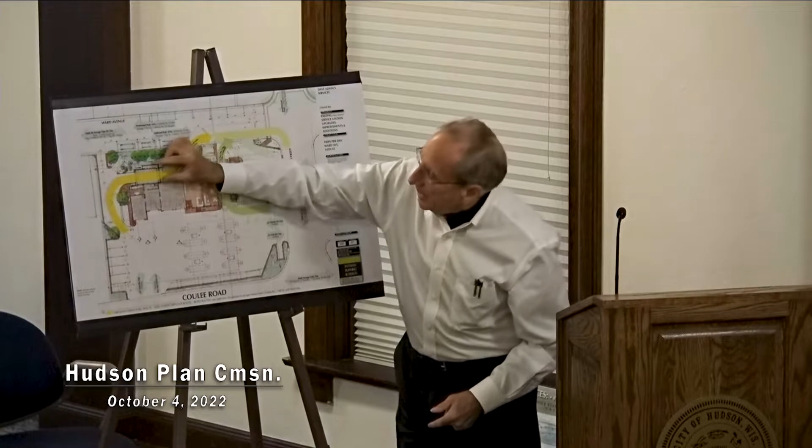This is phase 1, his garage. His car wash used to operate as a tunnel. I used it a long time ago, and some other people did too.

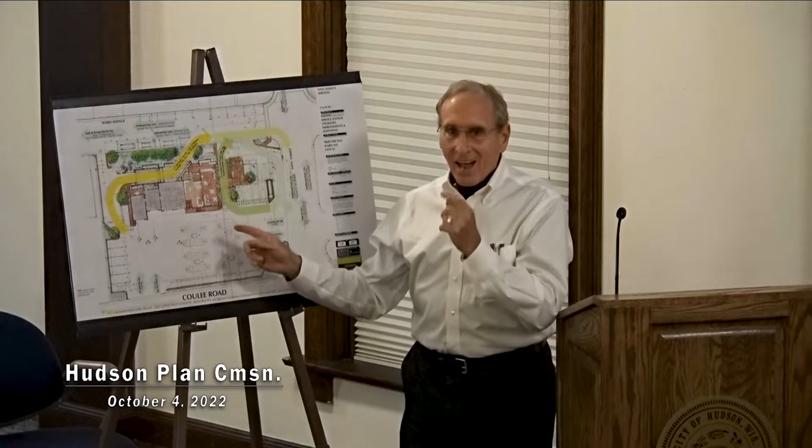1958 bathrooms in a Standard Oil station don't exactly meet Americans with Disabilities Act criteria. It's the best you could do in 1958. Boy, they're cool, those panels, they are cool. Well, one of them is really cool, but we're not supposed to talk about that.

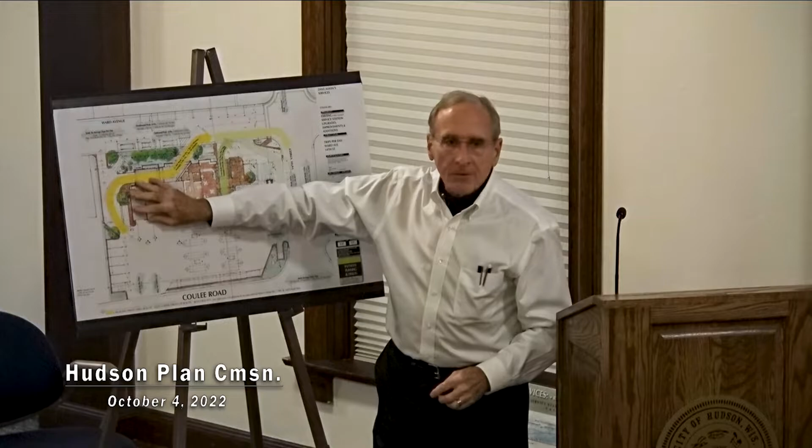So the idea is to do this in phases: to fix the garage, to add a garage, and to remobilize the car wash. And to do that...

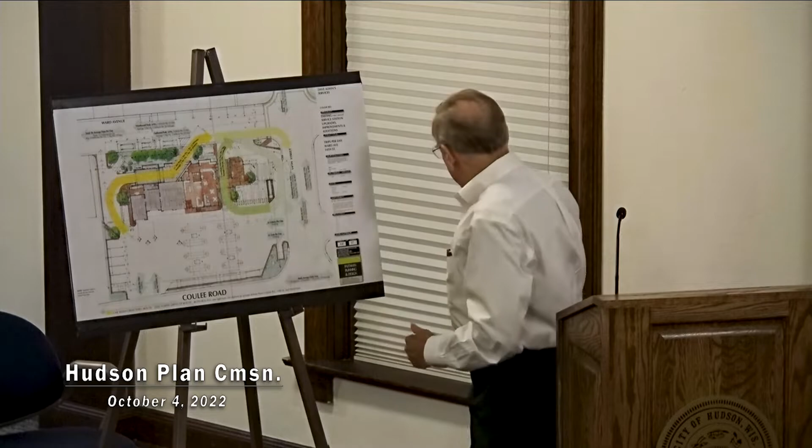If this end is closed off, a little bit bigger. This is the car wash right now, blue walls exist. If this is closed off and these become bathrooms and storage, and this car wash takes a turn...

Some could say that's not the most common approach, but this is a 23-foot-long crew cab pickup, monster truck.

I did a project called Liberty on the Lake in Stillwater, and Kwik Trip put its first non-standard building there with a car wash. The car wash has the door closed until the dryer cycle is completely done.

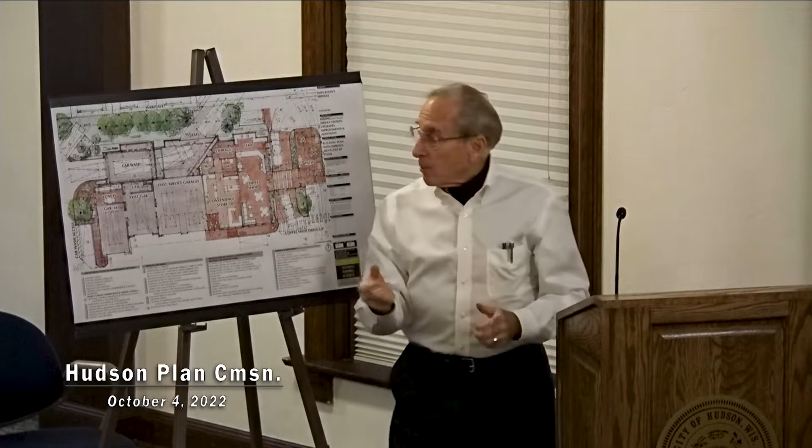So that's the idea of remobilizing this car wash, getting enough room to do what I said, to be able to do all the car wash inside the doors. Don't have to have the doors open. That's this, and that makes room for the bathrooms.

And this is his office, Mike's office, becoming his manager's office. And eventually, so here's phase 1 with this. This is probably phase 1, but maybe 2.

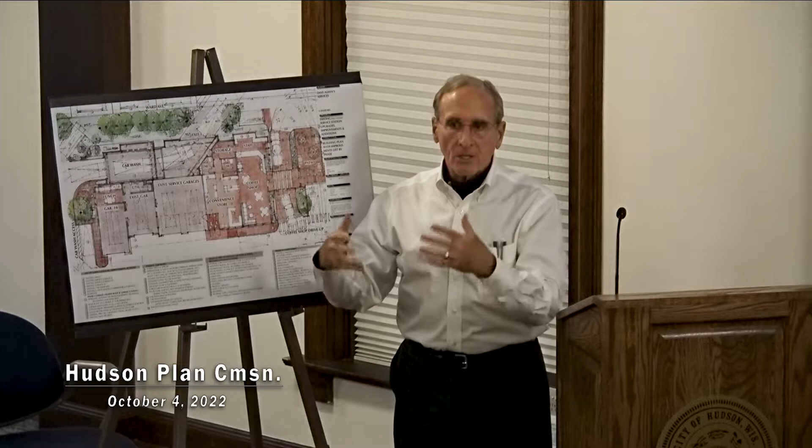Convenience store, there's not very many square feet, it's just some more products. And at some point, assuming we work out the flows and how to control the traffic, this is a small coffee shop with a drive-through.

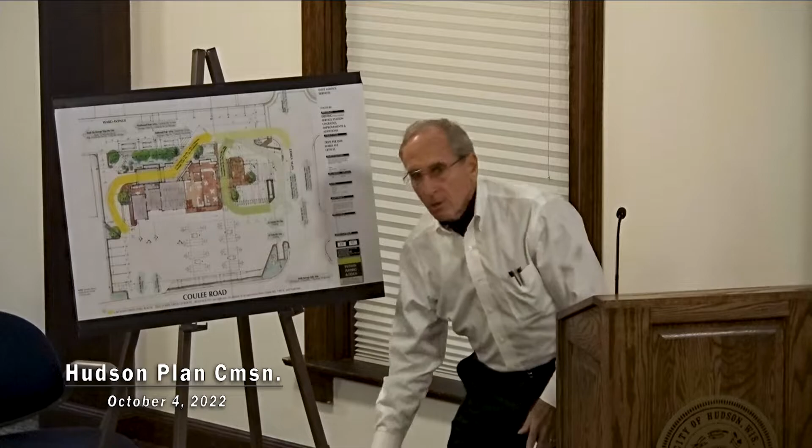And this was a pretty heavily researched bit of information with regard to the average trips through the car wash at the peak time of the year and not, and what the flows are through this car wash, through the coffee shop. Yes sir, where's the entrance to the car wash going to be?

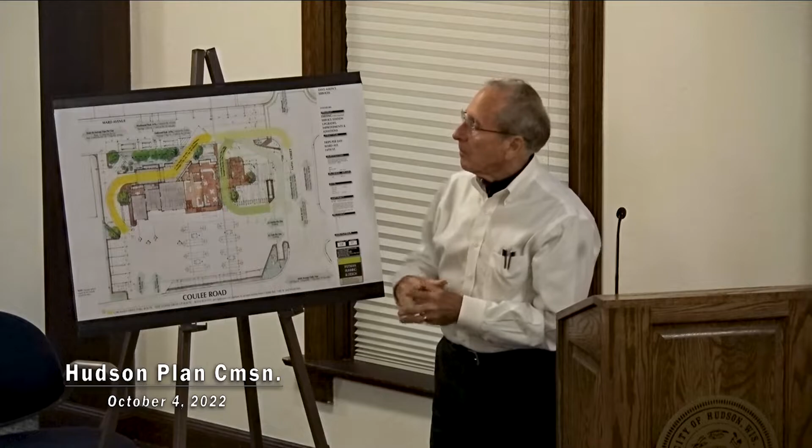If you're adding on 2 more stalls and closing in that third one, aren't you kind of sucking up the whole lot then? Looks like Ward Avenue. Is there still enough room?

Plenty of room. Okay, really, and in fact, if you look in the booklet, the multiple page 11 by 17 book, you will see the turn radii researched for composite vehicles.

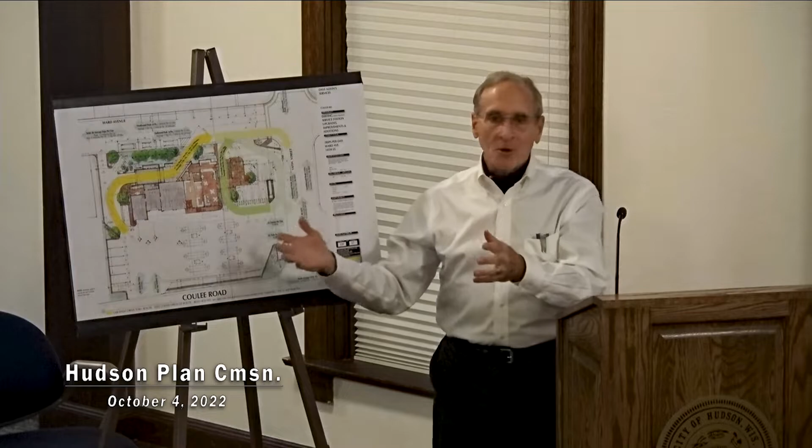That includes the biggest one. I just wanted to make sure there was enough room, why I asked. Yes sir, we painted spots out there, we turned trucks around. We tested it pretty heavily.

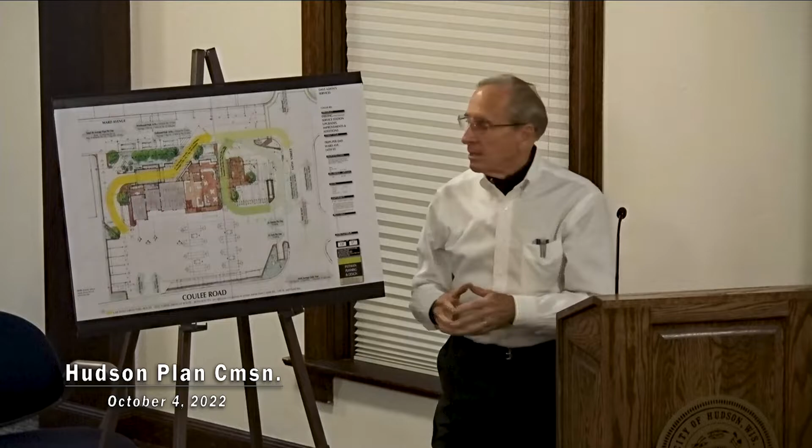Thank you. We've spent, honestly, months trying to get this right and do the best. We're not walking on water, we're just trying to do the best job possible.

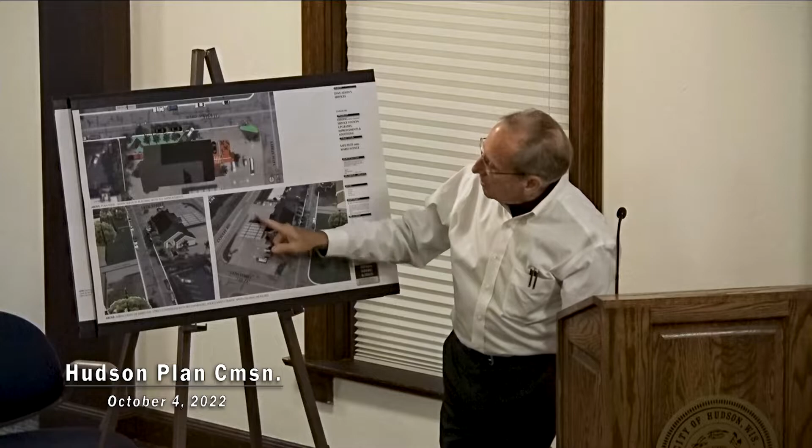Anyway, the 3D view or an aerial view of this. Here's the existing building, the cover over the gas pumps is not up in the air. This is kind of a modified aerial plus a 3D model, but here's the idea on this end.

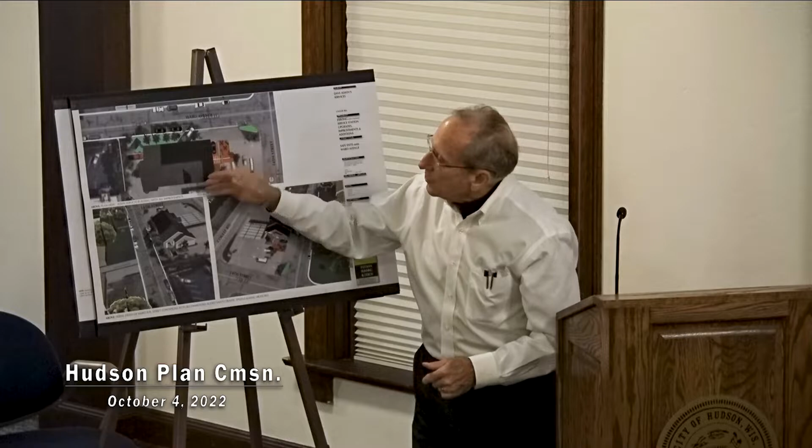Here's the existing building. Here's in the fourth, last phase would be the coffee shop, again assuming we can get all the staff comfortable with what we planned. And at the other end, here's that coffee shop, but here's enough room to make that turn.

And we did extend the existing space some to accommodate the vehicles, keep the door closed, and have room for real live bathrooms. So anyway, that's the 3D stuff.

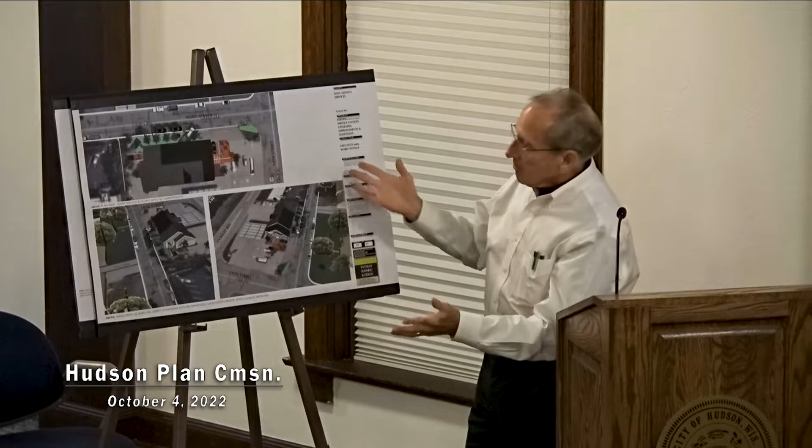I have way more boards. I can answer any questions, be happy to. Anybody?

So can I just ask, the turn into the car wash? You have the turn into the car wash, then you have arrows going to the exit. Can I come up and look at what... Yeah.

So the car wash is here, right? They're gonna turn in? The existing car wash, see these two blue struts? That's where the existing car wash is. We'd extend it that much. This is an existing garage, we'd add another garage.

If you go out there, you can see paint spots on the ground, or paving, and see how this route works. That's not what my concern is. I see how that route works. I'm saying when you have arrows going this way for people who want to exit and not go into the car wash...

Do you use the car wash downtown at what used to be Freedom? Yeah, but I'm just asking, because you either have to back out of that one or go through it. This was a way out if you changed your mind or forgot your credit card. So it's not meant for other cars to pass around? No, quite the opposite - that is not an exit, except for car wash users.

Okay, Mark, maybe I missed it, but what are your phases and as far as the timeline? Yearly, monthly, what's the plan going forward?

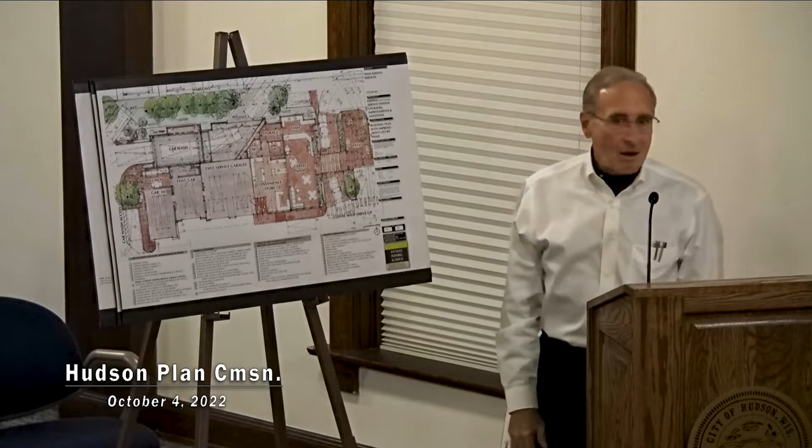How's your crystal ball with regard to the economy? If it's good, good. If we have a rerun of 2008, 9, 10, 11, hard to say. It's a big concern, yeah. I mean, I think it's neat, so I like it.

If you have cars parked on the north side of Ward Avenue, you're coming out of the car wash, is there enough space for a vehicle to turn west on Ward Avenue? Let me get the other board up.

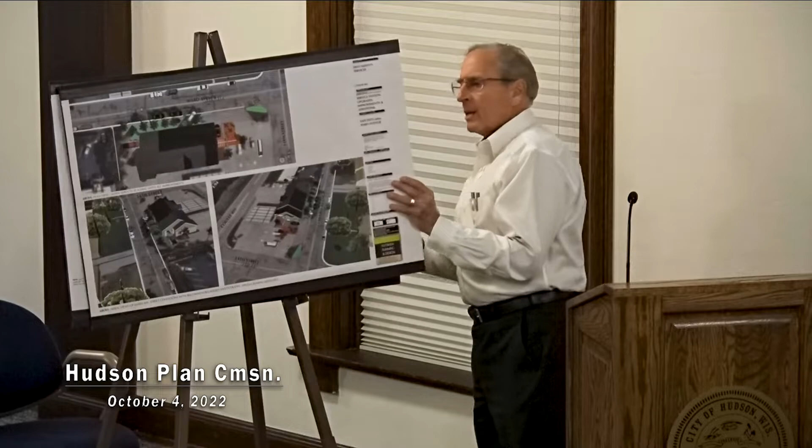I had it once. Are you able to see this okay? I'm looking at that right now.

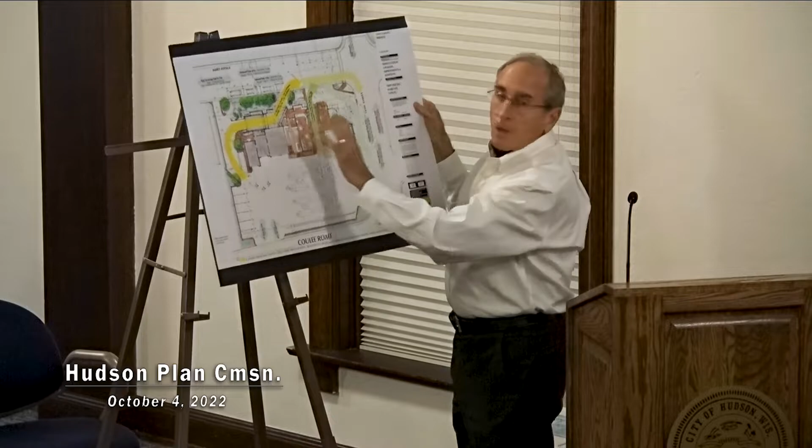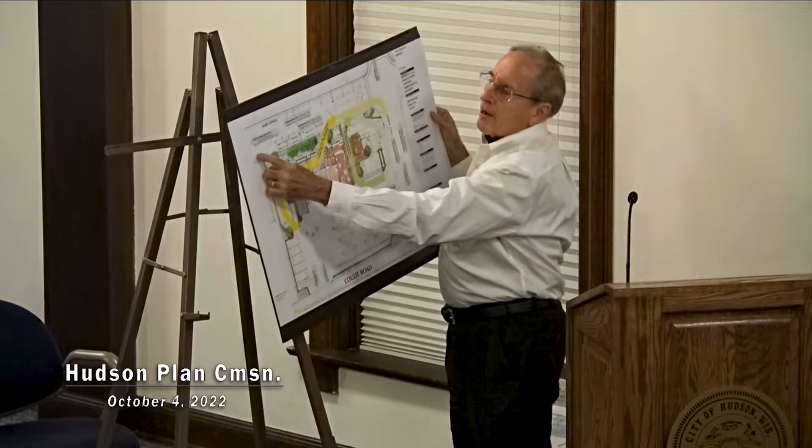The office building next door has 4 or 5 parallel parking spaces, and the last one comes right to their driveway here. And this has more space on either side than they do.

There's much discussion to be had with the city planner, city community development director, city engineer, and so forth, with regard to whether this comes straight out.

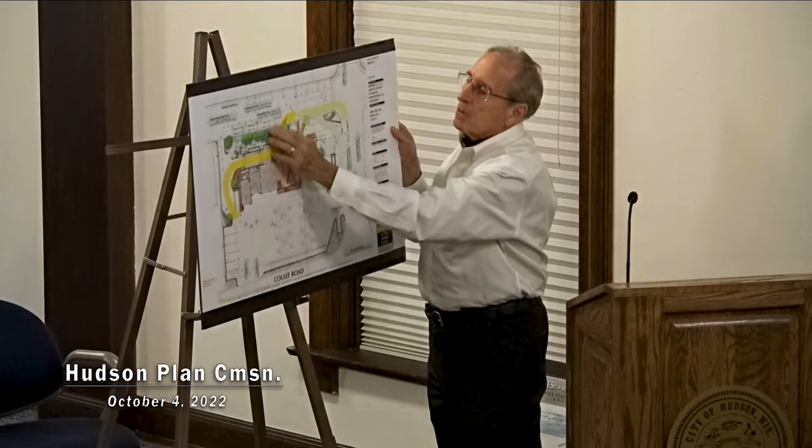This may sound crazy to use as the standard, but UPS plots or plans all their routes to take right turns because they're the safest. And this plan uses that approach to try to cause people to take right turns - right turn in, right turn in, right turn out, up here, right turn in, gentle right turn, when the left turn is inside the building, and a right turn and you're back out again.

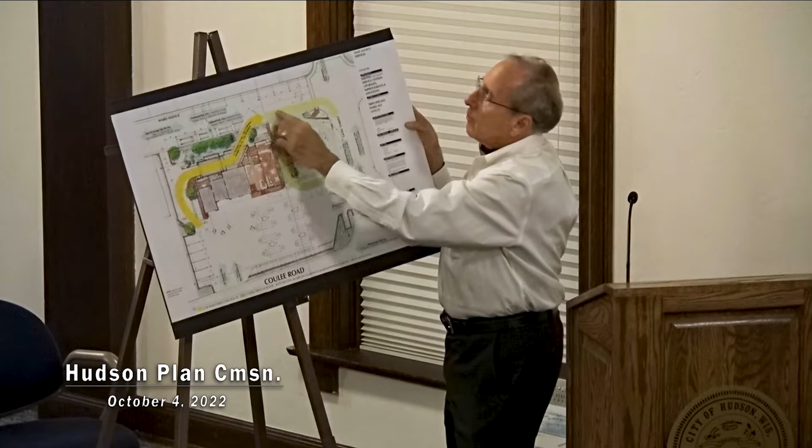So I'm not sure I directly answered your question, but the background is we provide parking spaces sized. No, the concern was, if a car coming out of the car wash decides they want to make a left turn onto Ward Avenue, is there enough space to accommodate a left turn if there are cars parked on the north side of Ward Avenue?

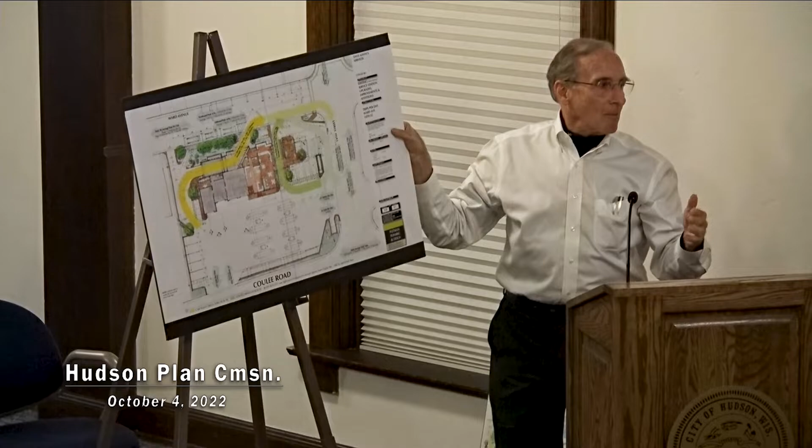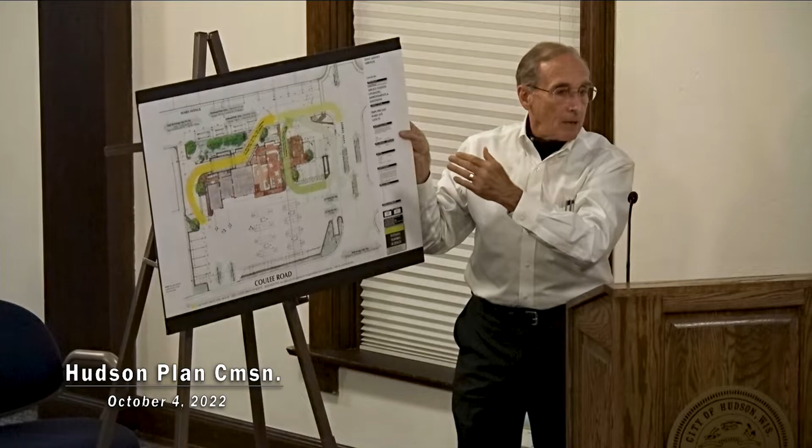Oh, yeah, that's a wide road, very wide. In fact, I studied it, and I didn't bring those boards along, but there is enough room to make the left turn. And by the way, the engineer report is recommending that this be a straight-out exit to enable that. And frankly, I think this is safer and better, and kind of oblique with regard to headlights spanning across people's houses on the other side.

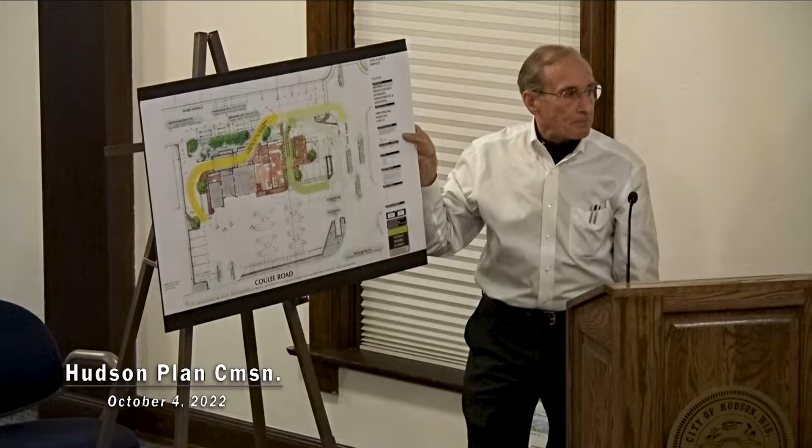There's other comments in the report, in the response, and I apologize for not getting it to you folks sooner, but we just got it yesterday. We did our best to get it to you quick. Ward Avenue does not have the traffic as of now, though. That would be the same as the Holiday downtown.

If you're trying to turn either way, but unless you turn right or go with traffic, your exit's pretty easy. If you decide to go left and cross that lane to get to the other side, the exit is not easy, because you have to wait for a slot for both sides to open up. Obviously some of that would have to occur here, except there's no traffic as of now.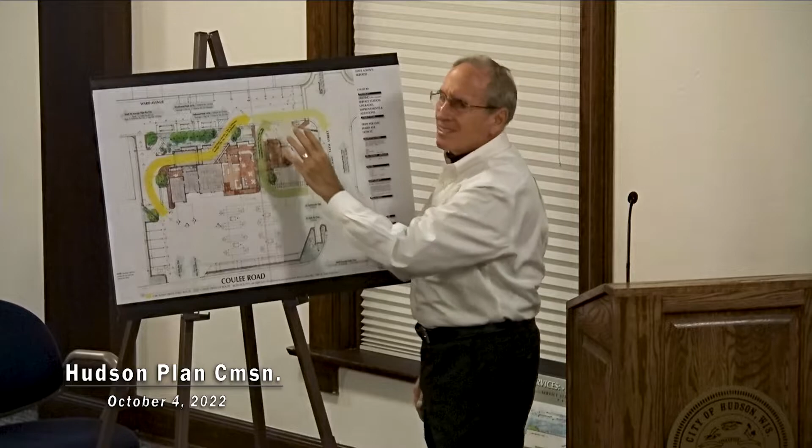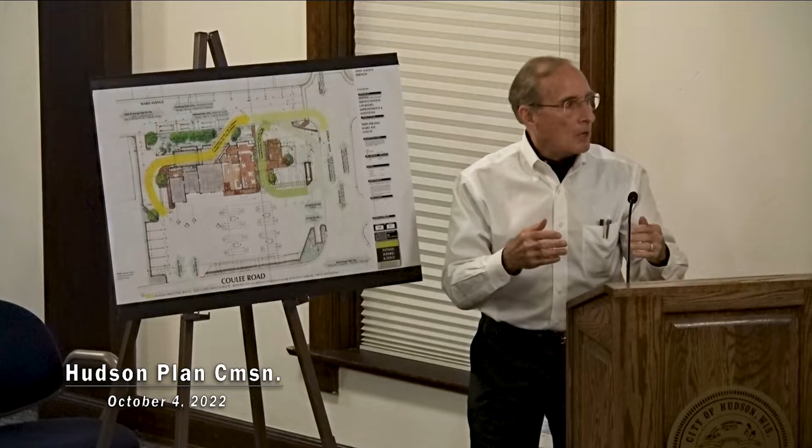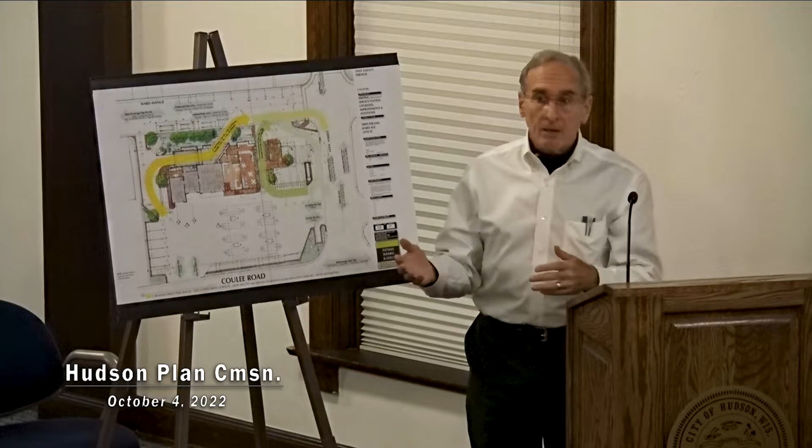We were really heartened, frankly, to see the people walking and biking, but there weren't very many of them either. Which has motivated me to try, there's 3 different designs for attempting to respond to the 2040 comprehensive plan, recommending ways of making pedestrians more invited and safer. So we drew those stripes on the paving. I didn't respond to that because I didn't have time, but we'll go through that with the staff as well. Please, I would welcome any urging on that account, because I'm into traffic calming design whenever I can.

Are there currently cars allowed to be parked on both sides there? Yes, there are. It's a big wide road, and driving it, it's usually later in the evening when there's parking on both sides, like after 9 o'clock, and you can still meet cars both ways.

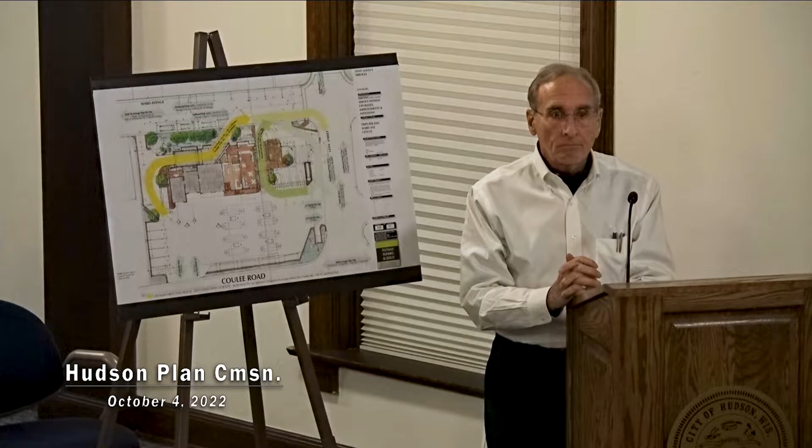Please remember, Ward is the extension that goes up all the way when you go further east, goes up behind Goodwill, keeps going up into the new development up behind Target and all that. So someday there will be traffic because it'll be generated all the way up where Target is now, coming down along that, I would think. We can't go that way now, that's a projection, but it's coming.

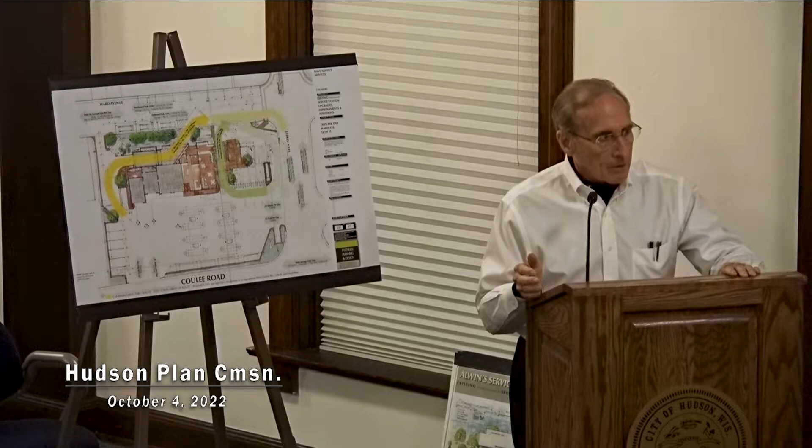What's really interesting about all these, we did motion actuated photography to count which way people were going in cars and bikes and so forth. We saw a number of people carrying gym bags and canvas bags to get food. They walked to get their food at Fresh and Natural, and they walked to go to Anytime Fitness. So that was, I think, kind of a motivation for some of those extra pages we put in, to at least offer the opportunity to do some painted routes for pedestrians and bikes, slowing cars down even with nobody on them.

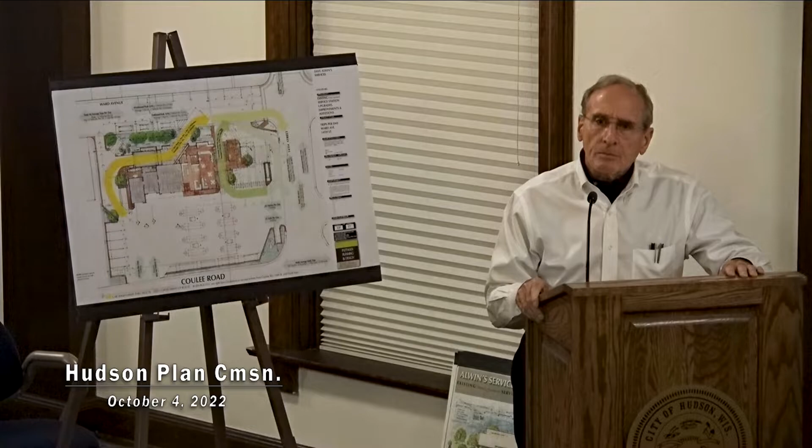So just an idea, but the only other concern is that intersection right in front of Mike's is the entrance to the interstate also. A lot of traffic going both ways on Coulee now. But of course you've got the cross street there, the north and south on the north side of Mike's, which I hope you're factoring in. We shot those trips as well.

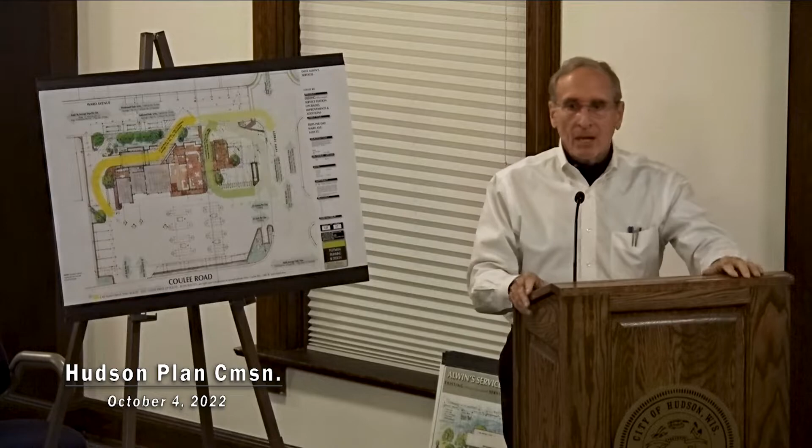Tiffany, what was the number for the Coulee Road? It was big, an amazing number, I can't remember off the top of my head either. I apologize, we'll have, I want to say 4,000 to 5,000, but that might be too low. I think it was amazing. I think it was 8,000. It was 8,000 something. It's just surprising.

The speed is what concerns me in there, because people coming up to that aren't going slow. They come in and they brake to make the hard 90 right or hard 90 left to get onto the interstate, but other than that they're whipping right along trying to get there. And they're coming from the Hanley Street Bridge and all of that, so it's just an area of concern.

When was a traffic study done? When was that done, when you guys were looking at how many cars were going on Ward Avenue? The traffic study for that number of cars, when was that done? This year, summer, for 2 weeks, this summer, in July. So school wasn't in session?

It was not, okay. So that's gonna add traffic there, when school's in session too.

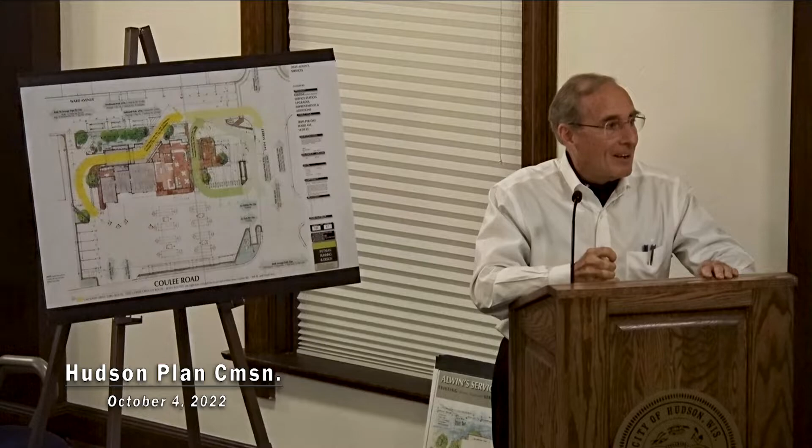I did put an asterisk that we did not have the ADTs for the buses, because I was aware that was missing. And frankly, we were hoping to see a lot more pedestrian use, kids, because we know that Mike's was a destination for a lot of kids, not just working, but just hanging out there. There's just a lot of people who walk in that area, a lot of walkers, and a lot of driving during the school year too.

You just know, based on what you're saying about traffic concerns, there's additional stuff. This is just an off-the-cuff request, but if you folks could look at those plans we proposed for pedestrian use and bikes, it's pretty well researched. We went after the complete streets, capital C, capital S, traffic calming design. If you'd like to weigh in on that subject, I would. I think it's a wonderful thing to calm traffic and provide an invitation for people to walk and bike more.

Well, the other thing that's gonna happen, just to add a little more gas on the fire, is that bridge is gonna get widened, and the traffic volumes across the interstate are gonna increase. Some will turn right or north to go up that way, and others will go the other two directions. Yeah, that's coming. There's gonna be a volume increase due to the bridge update, renew, widening, whatever they end up doing there.

Sure, and it'd be wise to factor that in now for what you're doing. Absolutely, and the staff report speaks to some issues at Starbucks. Our family has frequented that place since it started, and we knew of the problems with people backing out or trying to back out with the wait line for people going in, and the fix is good. But the Starbucks scale of operations is quite different than something with a fraction of that square footage, in our opinion. So, we can get into that in more detail.

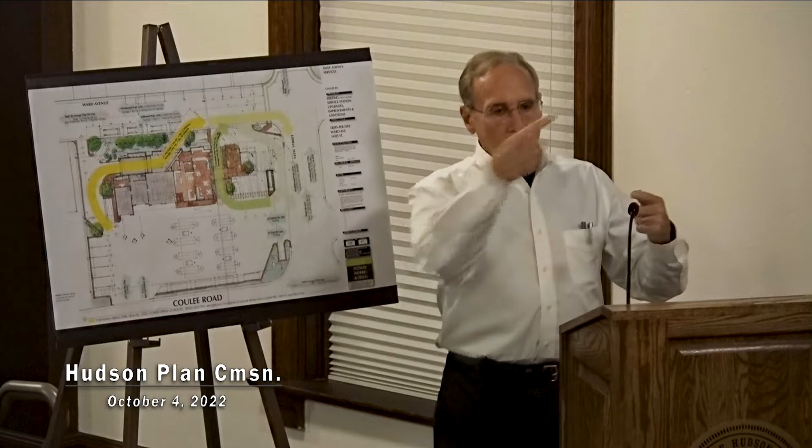So many openings - my observation is that you're providing more egress on the lot than what is currently there, with the idea of lowering the congestion on the current ones. That's the principle that city engineering and traffic engineering recommend, and this is just the opposite, to have more places to leave or enter.

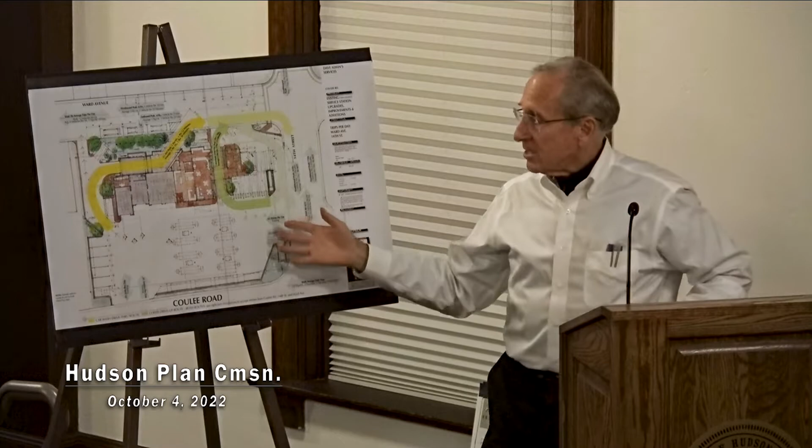Because the traffic speeds are so low, I asked about this - it's pretty unique in terms of the ability to cut corners. Their manager, who's been there forever, says he does not remember a single fender bender, not a single one, and he's never run into anybody at a gas station.

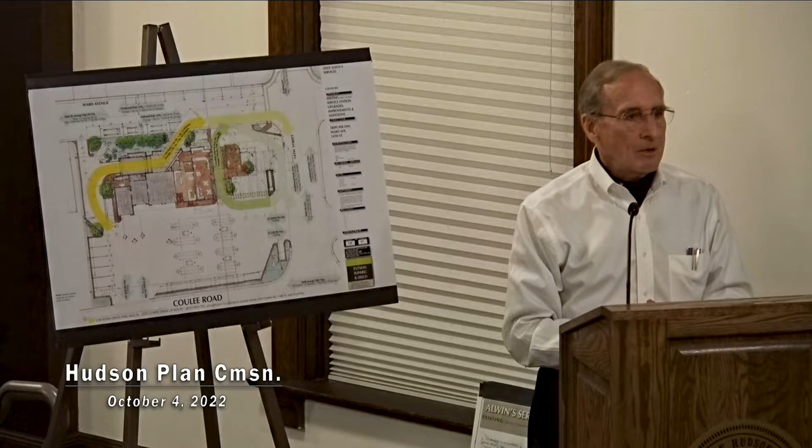Happy to answer more questions. Anybody else have questions or observations? Move to approve?

I second that, and I think that's a great place. I'm glad to see Alwin has taken the steps he's doing to make it into what he's doing, because if you recall, there's a bench all the way around the front of that thing where you used to come up and sit and drink your Coke - what a cool piece of Hudson history and ownership of that place. I'm glad to see this being done, really am.

Great, thank you. Okay, so we got a motion and a second. Anybody else have discussion? All those in favor? Aye. Opposed? Motion's approved. Thank you.

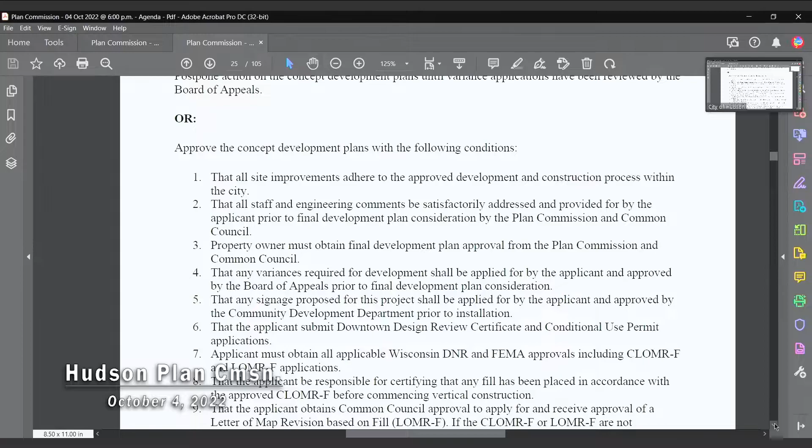Okay, so here's the recommended actions. Because this location is in the Rivertown Management District, we do have some conditions that apply to the Rivertown Management Zone as far as LOMR/CLOMR type applications through the DNR are concerned. So those are conditions we've added - similar to what we had to do with the 106 Buckeye property, if you recall. But if any of you have comments, feel free to speak.

Tiffany, would it be helpful if I gave a 60-second summary of the traffic study? Feel free, go for it. Thanks, I know you've got a busy agenda, so I'll be quick. Bob Loken, ESG Architects - I represent the development team, and I just wanted to give a summary of that traffic report.

So there were two documents that we supplied to staff, who then supplied them to you. One was the engineering study of both traffic and a parking demand study performed by a traffic engineer using standard national engineering standards. The second was the development team's anticipated parking demand per unit. I'll just go through those.

The application that we made listed 137 stalls that we're providing for 109 units. We actually do have 143 stalls - the application didn't include 6 compact stalls, which the zoning code doesn't acknowledge, so we didn't list those.

So there's actually 143 stalls that we're providing.